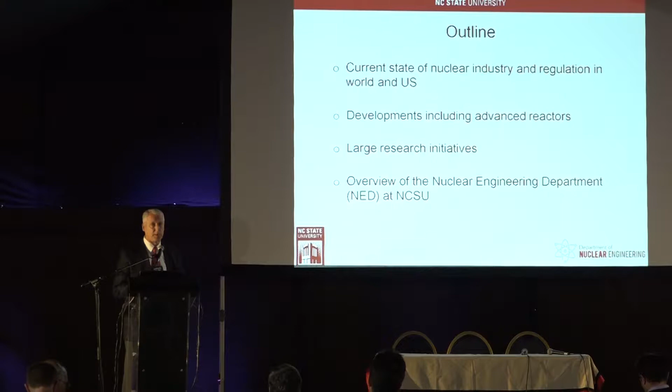So what I'm going to talk about today is the nuclear industry around the world and in the U.S. in particular: advanced reactors that are being developed, large research initiatives including NC State, and the possible collaborations there that we could talk about in the nuclear energy area.

As I mentioned, nuclear energy has been around for quite a while. First generation nuclear reactors were in the 1950s, before many of you were born—before all of you were born, obviously. Well, some of you may have been alive, but quite a while ago. Those plants are retired. We went on to the second generation; some of those plants built in the 1970s are still operating in the United States. Then on to the third generation, certainly in the world, and then the third-plus generation, plants being built now, much safer, much more thermally efficient, with lots of advantages over previous generations.

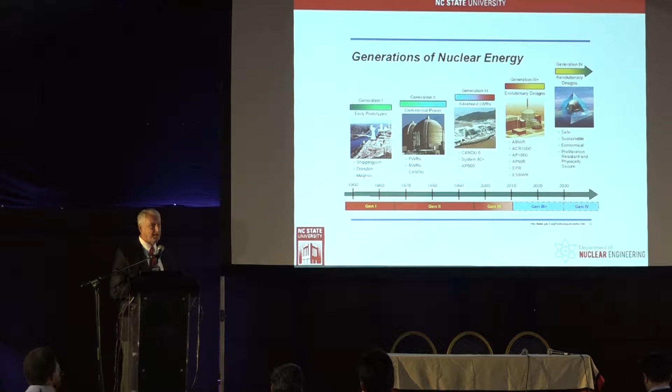So that's really where the action is, and in the future, advanced reactors are being developed in the United States as well as other countries in the world.

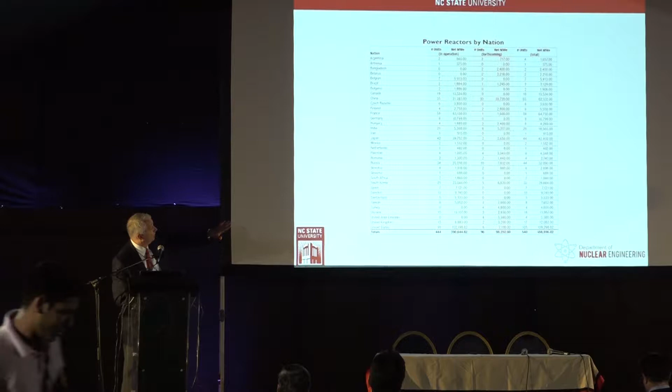Just to give you an idea—I know this is hard to read—it shows where nuclear generation is around the world in various countries, but the second column really shows where new nuclear plants are being built presently around the world. The United States, just a few plants: one was completed, another two to four are being built right now, light water reactor kind of plants. But as you can see, places like Turkey, UAE in the Middle East are building nuclear power plants, and Japan is bringing back online some of its nuclear power. Russia, of course, United Kingdom—the British are building nuclear again because they don't have natural gas, they don't have oil, they don't even have clean coal, so they don't have any other alternatives.

So the reason you see nuclear power being developed in many countries is because they don't have alternatives that would be viable. For instance, China has 30 nuclear power plants being built right now. It's a big worldwide development project. They're using US technology as well as technologies from other countries, and so the United States and other countries are helping China actually get to that point. It's very polluted in China—they burn a lot of coal. They want to get rid of the coal, and they want to use something clean like nuclear energy.

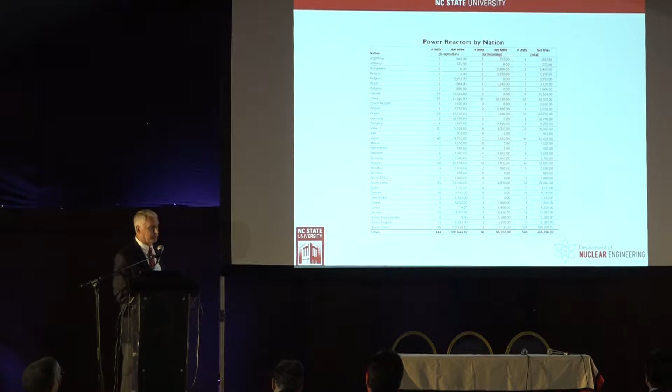But at the same time, you've seen a reduction in use of coal for electricity production, and an increase in natural gas in the United States for production of electricity because of the large new discoveries based on fracking and others, in areas where gas turbines are very useful in terms of handling peaking, and other combinations of gas turbines with renewable energy, very useful. So that's on the increase.

Nuclear is about steady. It's about 20% of the total electricity generation in the US, and that's continuing. There are a few plants shutting down for economic reasons only, so we'll have to see how that plays out in the future. A few plants are also coming online.

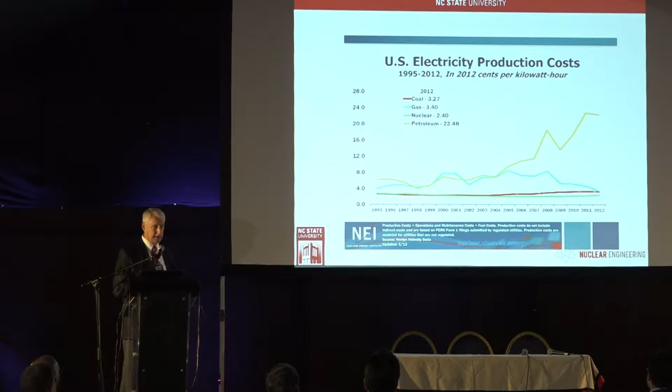Production costs in the US, of course, have changed. Petroleum has gone way up. Nuclear has gone up a little. Natural gas has gone way down because of the new discoveries, and that's why so much natural gas is being used in gas turbines in the US right now. That's really setting the tone for what the cost of electricity is going to be in the US.

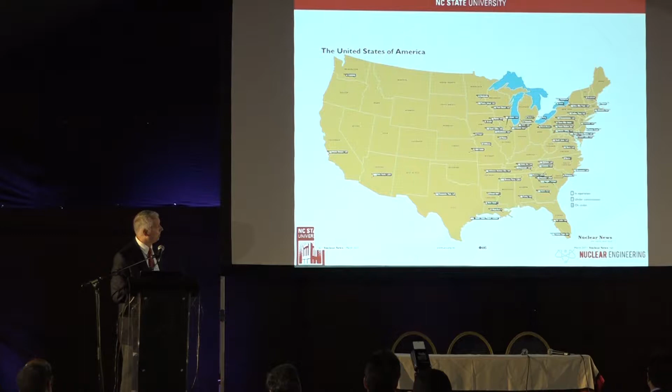These are where the nuclear power plants are distributed in the United States, mostly in the eastern half of the country. Diablo Canyon in California is going to be shut down eventually. So most everything is in the eastern part of the United States, and any of the new plants being developed and constructed in the US are mostly in the southeastern part of the United States, including North Carolina, of course, on the East Coast. So we're in an area where new generation is needed because it's a growing economy, a growing population, and that's where you see the development of nuclear power and renewables in the United States.

So I'm going to talk about some of the new developments in nuclear energy and what some of the universities are doing to help participate in this redevelopment of nuclear energy in the future.

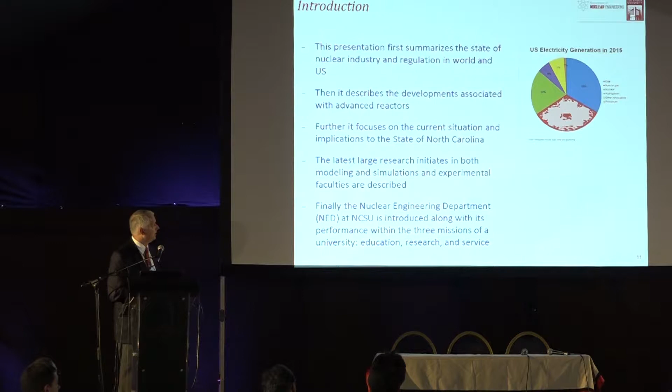Nuclear energy projects are large projects, lots of concrete, lots of steel, lots of construction workers, lots of jobs. So it's a very intensive kind of energy source. From that point of view, it takes a whole commitment of a country, commitment of a government, commitment of economic resources to accomplish this, and that's why everyone is not doing it.

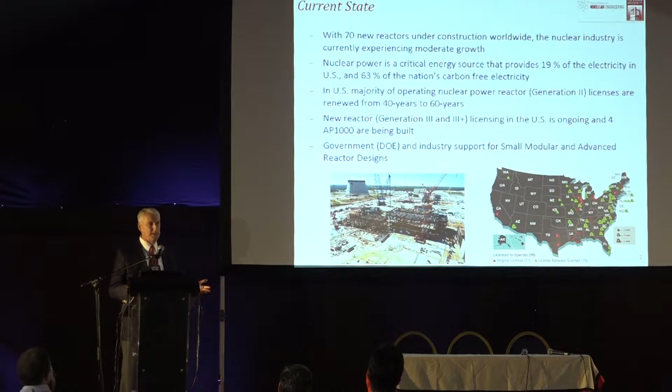At the same time, though, it provides stability. Price of uranium is very low. There's no CO2 emitted in the process of nuclear energy. The waste problems are very minimal and can be handled, and so in that sense it's actually very safe. At least in the United States, there have been no accidents in many, many, many decades, and no deaths at all in that technology. I would challenge any technology of any size to make that claim.

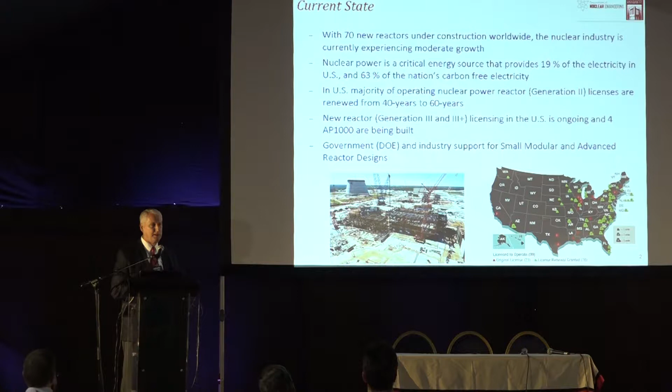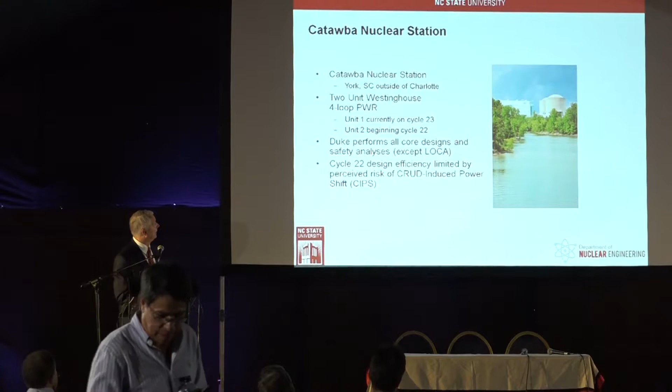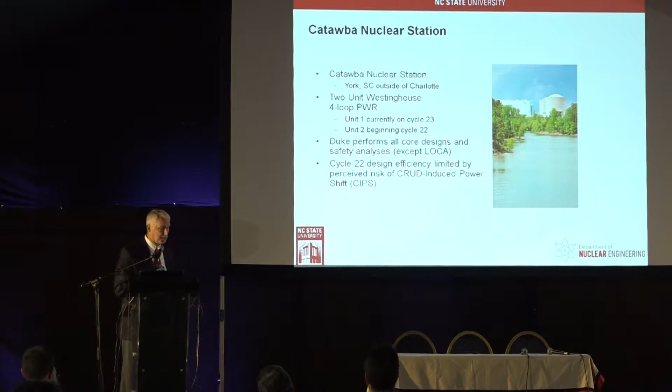So you can see, as a carbon-free source of electricity, this is very important for the United States and for the world. As an example, in our backyard in North Carolina, the Catawba station outside of Charlotte has been operating for many, many years. The kind of problems that our university, NC State, is working on through one of our consortia is eliminating one of the sources of downtime operation in that facility, called crud, which is part of the chemistry problem associated with water flowing through the reactor.

Watts Bar is another nuclear power plant that our faculty and students have worked on. Watts Bar is in Tennessee, not too far from us, and this is a very important source of power for that region of the country.

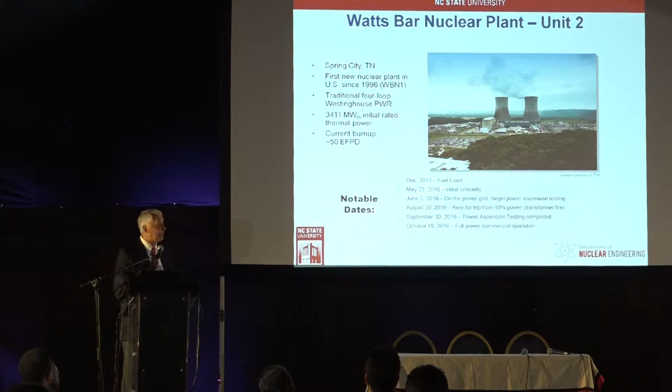In the near future, it looks like the market for nuclear energy around the world will be involved with smaller plants rather than larger plants. Smaller plants have the advantage that you can build them perhaps quicker, put them in place in modules, in smaller bytes or bits, but they're still pretty big. They're still 50 megawatt or 100 megawatt electric devices. But you could put a couple in this tent.

It's not too big. On the right, you would see what one of these small modular reactors would look like. There are companies in the United States building these now. NuScale company is building a modular reactor of this type. It will be safer, it's more efficient, requires less water, has the advantage that if there is some kind of disturbance, it can sit there and percolate on its own. It doesn't need off-site power. So a very safe kind of reactor concept.

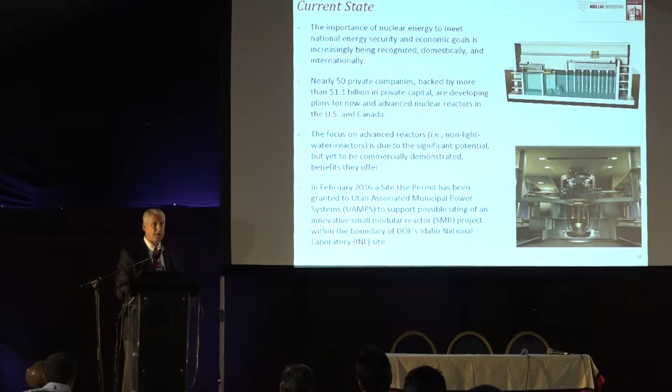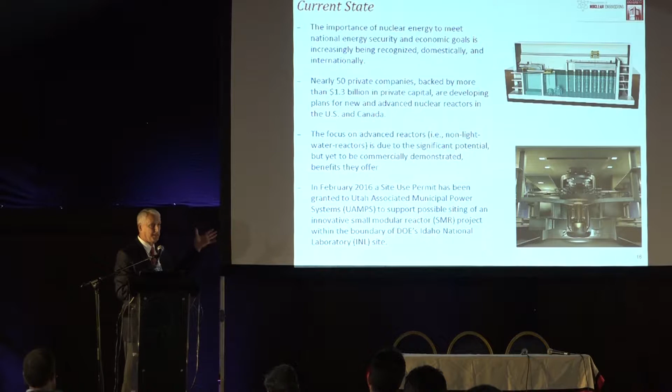NuScale building this kind of device is actually going to be sited perhaps at the Department of Energy Idaho National Laboratory site out in Idaho, where many of our faculty and students work alongside the Idaho National Lab staff. So this is very exciting for the United States to see NuScale produce a new modular kind of reactor with many advantages. So in the future, you may be seeing more of these, not only in the United States, but around the world. Other countries are developing modular reactors.

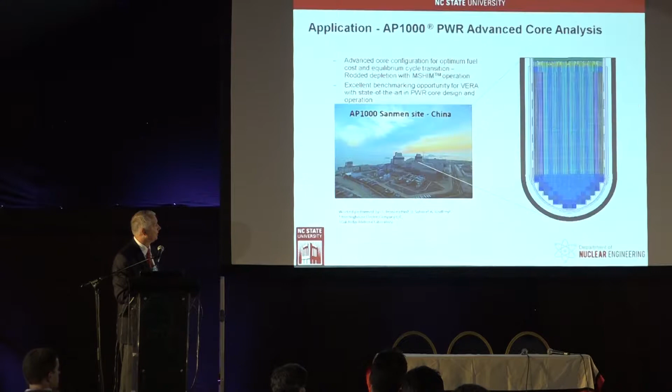Again, no, going the wrong way.

License renewals in the U.S. through the Nuclear Regulatory Commission, very important topic. There are various scenarios in the future depending upon how the license renewal process goes as to what fraction of the total amount of energy will be delivered by nuclear. Remember, nuclear is a baseload kind of electricity. Dr. Iqbal mentioned the load following problems associated with renewables, and so how do you integrate that into the grid? Nuclear is one of those sources that's pretty steady. It can go up a little bit and can go down a little bit with time, but it's a baseload capability, which has strong advantages for stability in the grid.

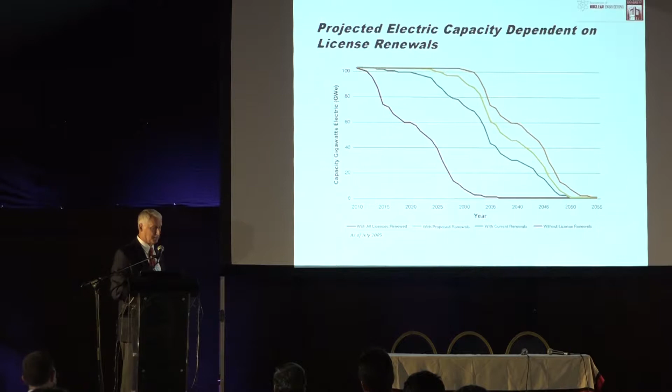These are some of the types of reactors in the U.S. fleet right now from various vendors. AP1000 from the Westinghouse organization, advanced boiling water reactor from General Electric, and new designs coming online all the time.

These are some of where new licenses are being developed, possibilities in the U.S., and again, many of them in the Southeast, including Florida, Texas, North Carolina. Whether or not these will be built, we don't know for sure. They're just going through the process of starting the licensing because it's a 10-year process to get through the licensing. We want to make sure we build these things safely. So the Nuclear Regulatory Commission watches over these very strongly.

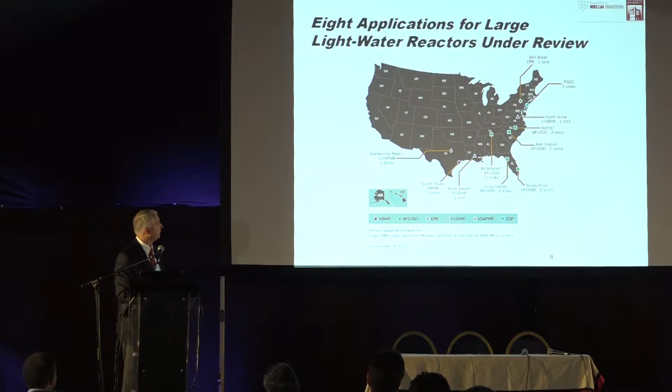Some of the advanced reactor concepts that people are talking about are not only being invested in by the Department of Energy, which is, I guess you could say, where we do the basic research, but also many companies, as you can see here, are coming up with new designs for new, advanced, safer, more efficient reactors based on non-light water reactor technology and different designs that have many advantages.

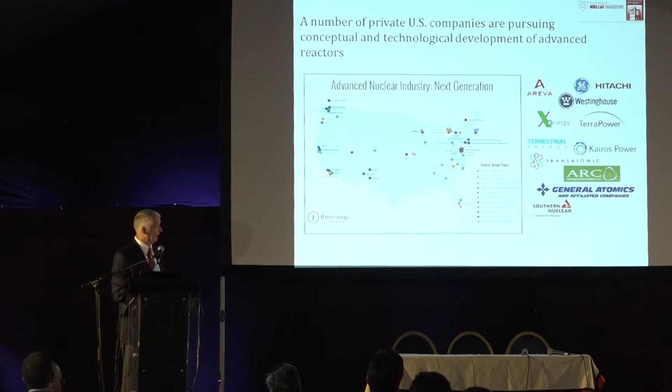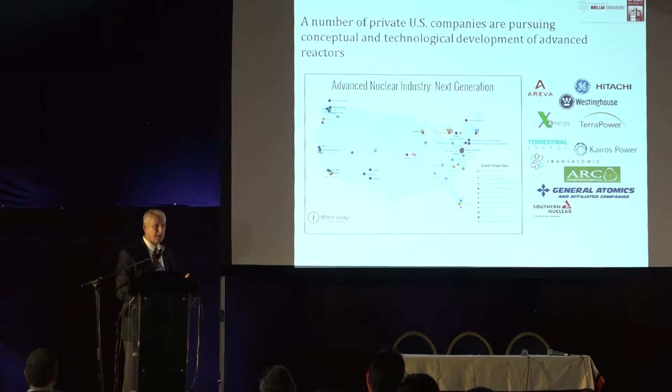For instance, I'd point out TerraPower. TerraPower is owned by Bill Gates, who owns, of course, Microsoft. He's investing in nuclear power because he sees the advantage of providing baseload power for lots of different reasons, for various countries around the world, as well as for electricity for many of his computers, I suppose, and data centers as the future evolves. So many companies are involved with these new generation designs.

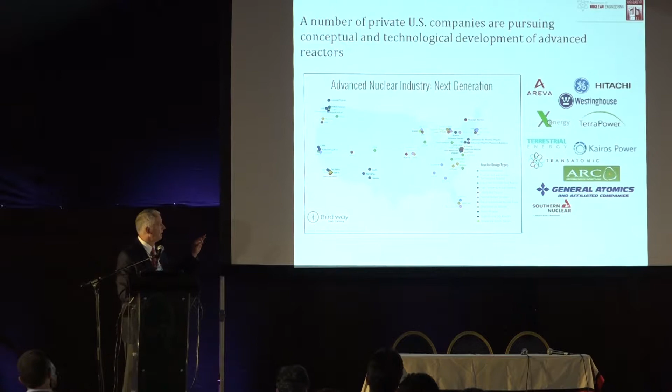Some are very small companies, like Transatomic, which is a spin out of MIT. NuScale was a spin out of Oregon State University, and so forth.

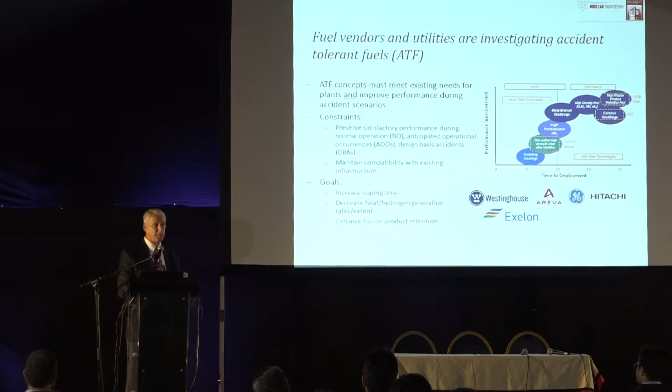So another initiative by many of those companies and the Department of Energy, and also that our faculty and students are working on, is something called accident-tolerant fuels. If you remember in Fukushima, one of the reasons that the plant there had instabilities was because of hydrogen released from the zircaloy fuel cladding. Accident-tolerant fuels means that new fuels are being developed that don't develop that capability, so they don't produce hydrogen under high temperature conditions.

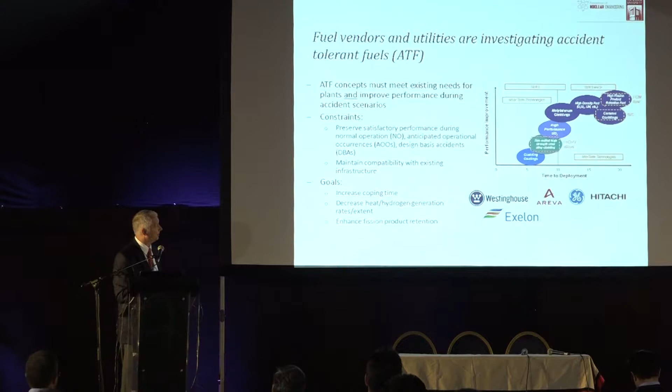So a number of our faculty are working on different kinds of cladding and or fuel structures that will avoid that problem. Much of our money from the Department of Energy is going in, as well as from companies, to develop these kinds of new fuels. And of course, it takes 10 to 15 to 20 years to develop these kinds of new structures. That's why universities are involved at the present time in making sure that we can come up with new forms of, for instance, stainless steel or other alloys that don't have the same problems as zircaloy.

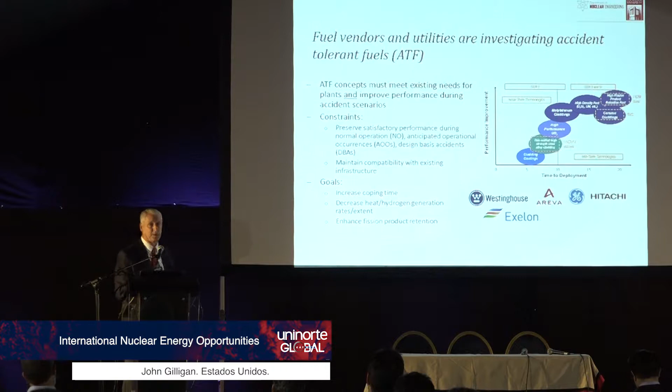There's legislation occurring in the U.S. Congress to help nuclear develop, as well as in the current administration, not only on the nuclear energy side, but on the nuclear security side. Because whatever we do, we want to make sure that nuclear material does not get into the wrong hands. So nuclear security, along with nuclear defense, as well as the nuclear non-proliferation problem we're talking about here, are all very important to the United States and to our allies.

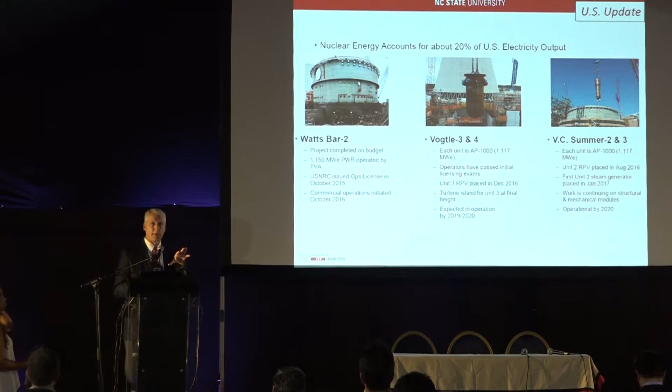These are the plants that have either been finished, are being finished, or eventually will be finished in the U.S. Watts Bar was just completed. Vogtle 3 and 4, on the Georgia-South Carolina border, hopefully in the next year or two, are very large plants. The Summer plants are currently on hold and will probably not be finished on time until a new owner is found, so that's a big uncertainty right now in the U.S. But our graduates from NC State University are involved with construction of all of these plants. In fact, the construction energy business in the U.S. for nuclear is based in Charlotte, North Carolina, which is about 3 hours from NC State.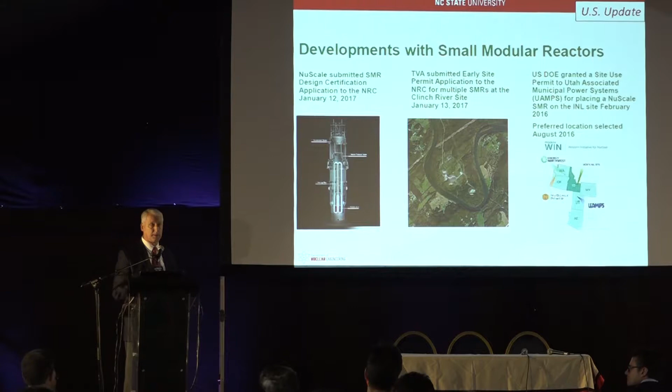So I mentioned the small modular reactors. This is another slide showing the size and scope of the SMRs on the left. A possible site either at Clinch River or in Idaho will more than likely occur. They've submitted their licensing documents to the Nuclear Regulatory Commission, so these are moving right along. They have funding, and they're looking for that development site to show what they can do and how quickly they can come up to speed.

Many private organizations are supporting the development of nuclear energy in the U.S., as I mentioned, including private institutions, Electric Power Research Institute, Third Way, which is a national think tank that looks at nuclear energy policy as well as energy policy in general, and organizations organizing the advanced reactor community. So there's still a strong interest in nuclear in the U.S.

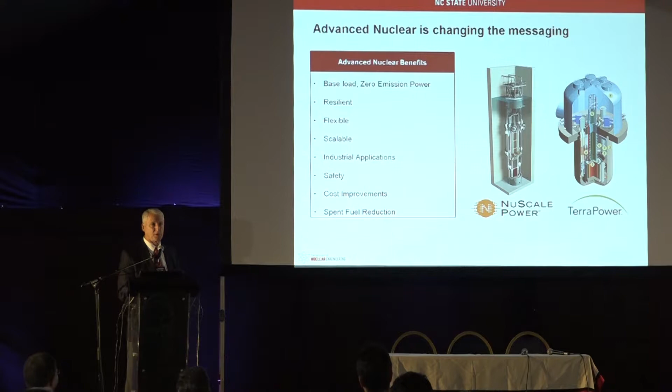Again, another picture of the NuScale power plant as it would be built. The advantage of the NuScale plant is that it's built in a manufactured environment, in a separate plant, and then carried by truck or train to the site where it's going to be located, dropped in the ground, or in a concrete vault, and hooked up to the water supplies, et cetera. So all the manufacturing is done prior to arrival on site. It should be much cheaper, much more straightforward, much more reliable than trying to build on site.

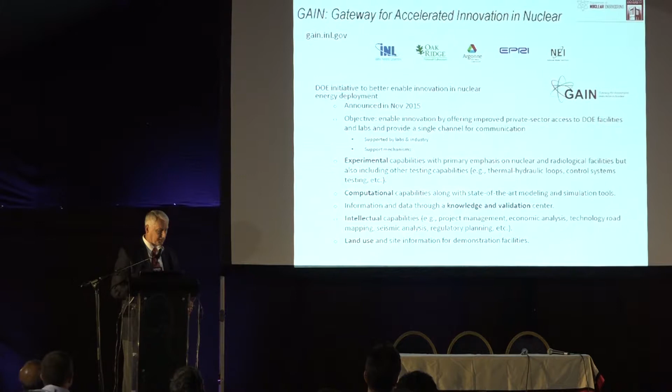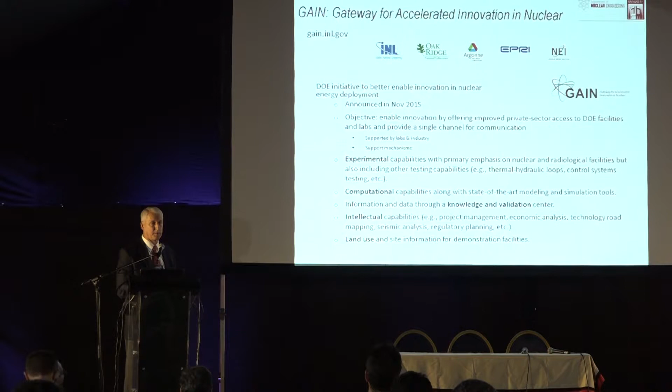One initiative that the Department of Energy has right now, as well as supporting the universities, is something we call GAIN, the Gateway for Accelerated Innovation in Nuclear. GAIN is an attempt by the Department of Energy to integrate and get more support to industry in the U.S. This is just one way we're going to do it. It opens up all the national laboratories to accessibility by private industry in the U.S. This is very important so they can do testing, radiation hardening experiments, et cetera. The idea is to support industry from the government in a more meaningful way and hopefully stimulate more interest and development in the nuclear area. This is the second year the GAIN program has occurred. There's a voucher program where small amounts of money are available to support this, and it's moving along very nicely.

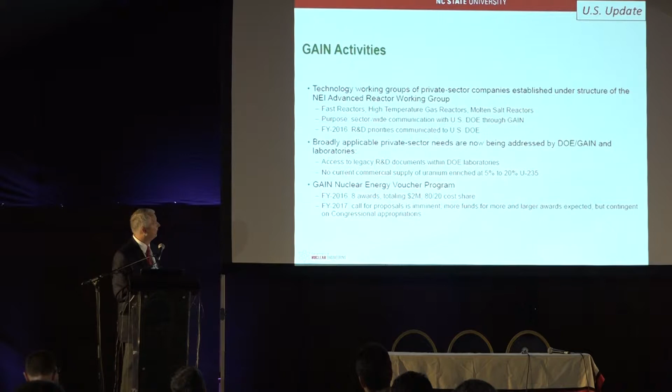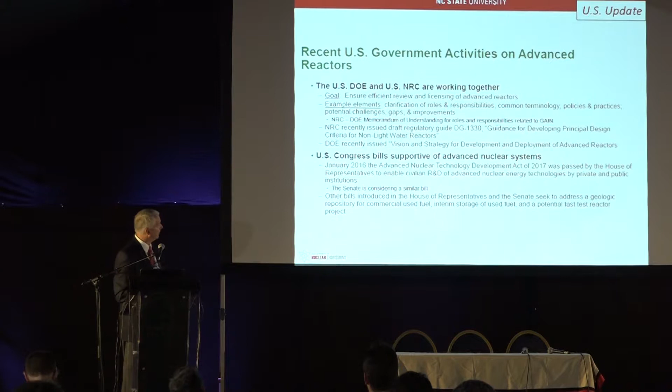This is also a word slide that shows some of the support from Congress and others in terms of working together along with industry to support nuclear.

There are a number of different reactor concepts out there. One of the new ones being revived, I guess you could say, is the fast breeder or fast reactor as a testing facility. This is a facility that would probably cost on the order of $3 to $4 billion and would likely be built at the Idaho National Laboratory. Some of our faculty at NC State are now working on this design to help the Department of Energy. Our students and faculty are actively getting involved in this process right now through projects and joint faculty positions with the Idaho National Laboratory. So it truly is a joint university, national lab, and industry effort.

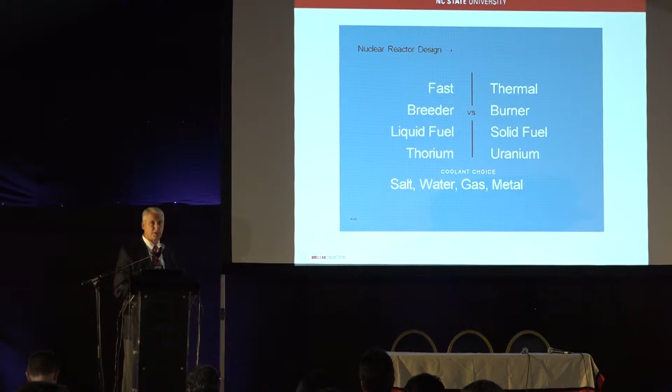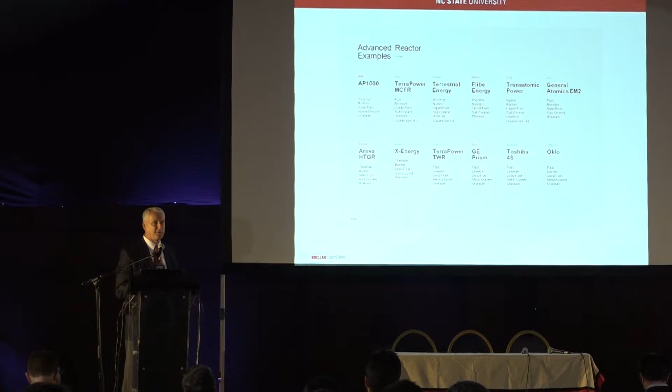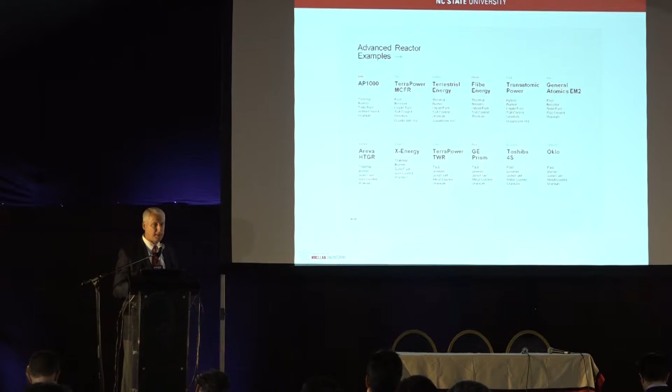Again, this is a list of the number of companies involved with the advanced reactor community out there in the U.S., TerraPower, Terrestrial Energy, et cetera. It's very exciting to see all of this private venture money coming in now. It's not the same old people designing the same old reactors. These are new venture businesses putting real private money into development of new, safer, advanced nuclear designs, and that's very exciting. I've never seen anything like this in 30 years. It's really an exciting time to be a nuclear engineer, working in the nuclear power area, for both students and faculty, because of the many opportunities that have come about recently.

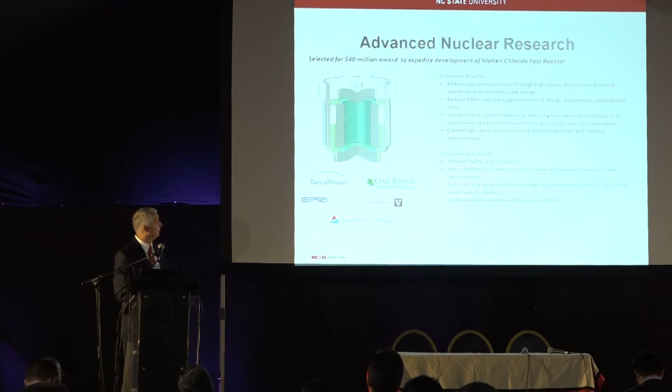There are plants being shut down in the U.S. right now. I did want to mention that. It's not because they don't work or because they've had an accident or anything like that. It's because the price of natural gas is so low, they can't compete economically to produce electricity. So if you can put in a natural gas peaking unit, or even a base load unit with gas turbines, with very low cost natural gas, even existing nuclear power plants can't compete with that.

Neither can renewables, for that matter, or many other sources of energy. So it's a concern in the U.S. that some of these good plants are being shut down because you lose stability. The price of natural gas tends to go up and down over long periods of time. It may have environmental impacts. And as we sell more liquefied natural gas to other countries, the price of natural gas may go up because there is a world market for that product.

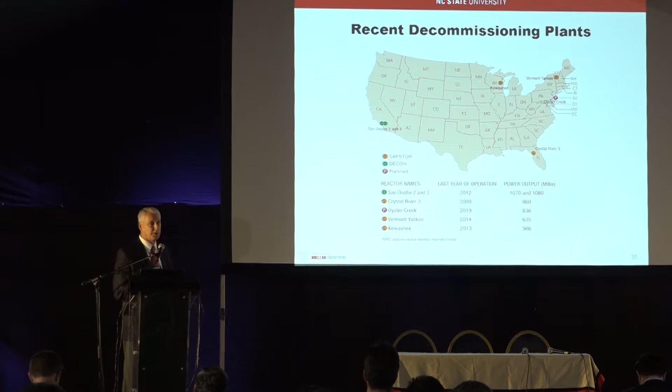So we're watching this very carefully in the U.S. It does mean that as some new plants come online, some of the older ones will be shut down in certain markets.

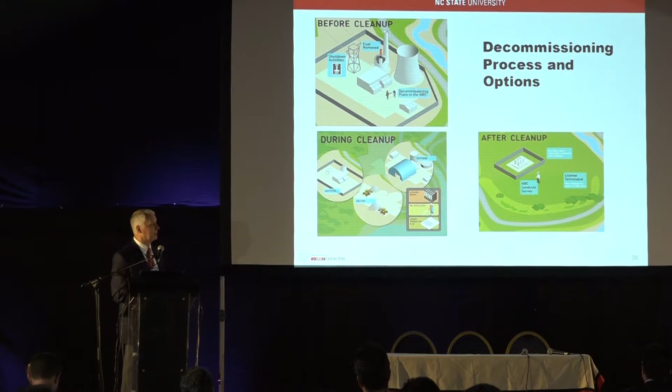So in the decommissioning process, you're talking about, of course, taking the old fuel out, eventually taking each of the components out, disposing of those in a safe way, and then after cleanup, making that site perfectly clean again, confining anything that might need to be confined. Of course, many plants have already been shut down in the U.S. over the years—probably 25 plants. So it's nothing new, it's just an ongoing process.

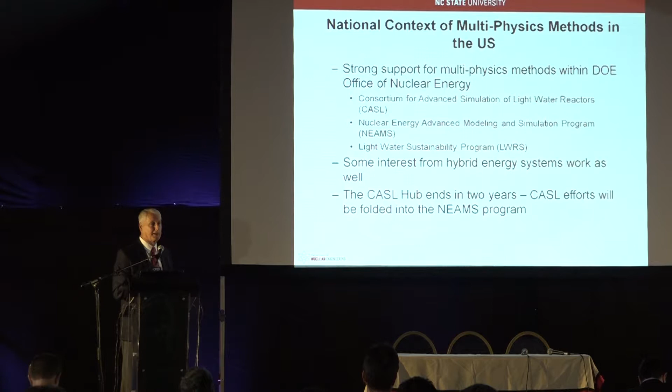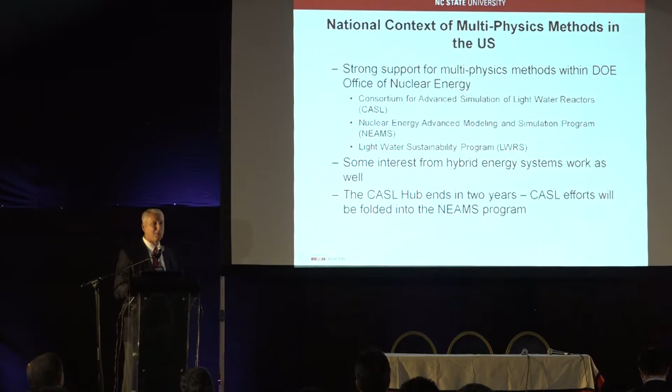Some of the projects our faculty and students are working on are design efforts. We have a very large innovation hub sponsored by the Department of Energy called CASL. CASL stands for Consortium for Advanced Simulation of Light Water Reactors. NC State is the main university, with partners MIT and University of Michigan. As part of this group, we're designing new computational tools for this next generation of nuclear reactors to make them more safe and less costly, but more efficient. So it's a big effort along those lines.

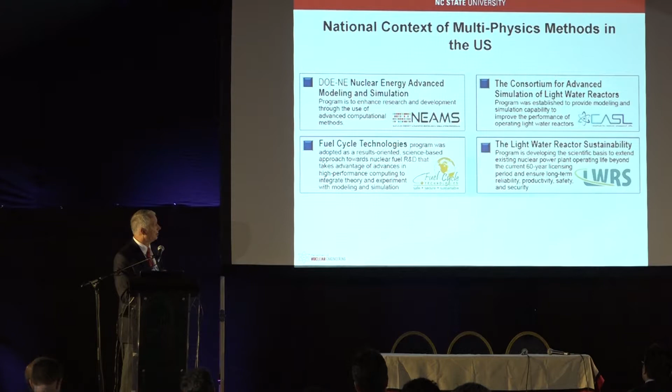CASL, up on the right, is one of our efforts in nuclear engineering at NC State, sponsored by the Department of Energy. Of course, there's also the light water reactor program out of DOE, fuel cycle technologies, and NEAMS, which is the computational group out of DOE—a multi-kind of approach to designing new reactors using computational tools that weren't available 20 or 30 years ago.

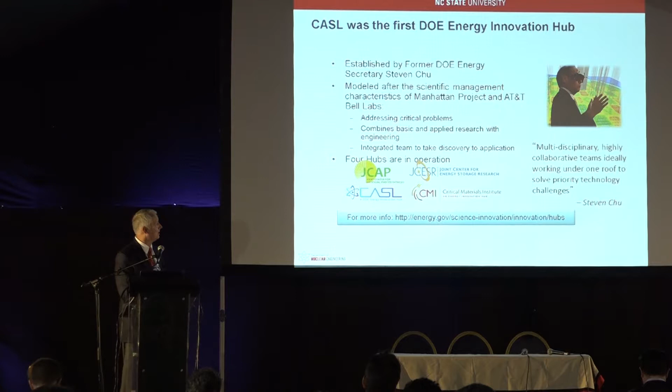This is CASL. That's the previous Secretary of Energy, Steven Chu, who helped get this going. A very exciting project, it's been ongoing now for 8 years, about $27 million per year over that period of time, involving multiple universities, national labs, and industry. I'll show a picture here—skip over that.

This is an example of the kind of large, meaningful work we can accomplish at a university like NC State. So I hope some of you are interested in studying these kinds of subjects in the future, in graduate school or even as an undergraduate. We have undergraduate students working on these projects alongside our faculty or any of our partners as well. So I think it's a great opportunity, and we hope you can be involved with these kinds of things.

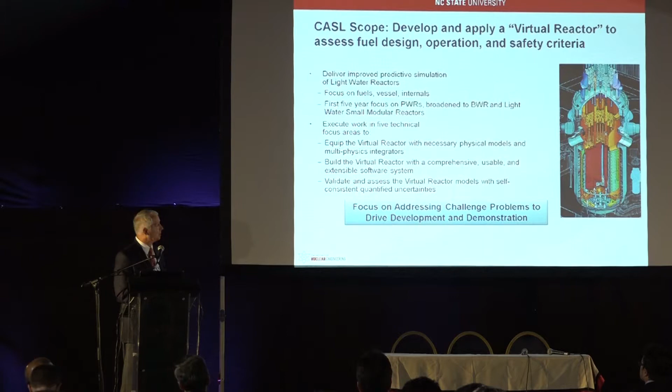It's multi-scale, multi-dimensional modeling, including multi-physics, which includes the chemistry, the materials, the two-phase water, heat transfer issues, as well as the nuclear processes, radiation transport, et cetera. Very exciting field. We're competing with the French and others to develop the best tools in the world to design these kinds of reactors.

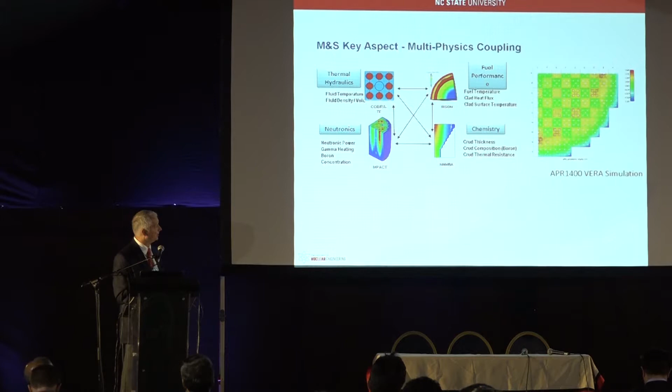I'll skip over some of the modeling details, but you can see it's three-dimensional, multi-physics modeling. That's what the core of a reactor looks like in real time when they're shuffling the fuel around. It aids the designers of nuclear reactors very much in seeing how things are going over a period of a cycle of the core itself.

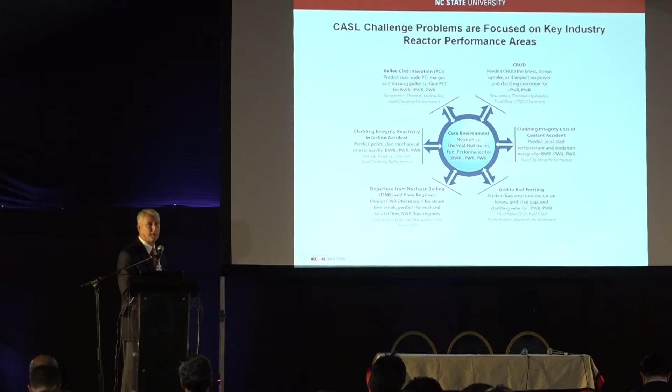This is the kind of work our students are involved with, a variety of problems involving a lot of multidisciplinary work, which is essential to solve these massive problems associated with new technologies.

This is a general slide showing another line of DOE work involving new computational tools outside of CASL. It's called the NEAMS program. This one is a bit smaller, about $20 million a year, and it involves other labs and universities throughout the U.S., as well as some of our faculty at NC State.

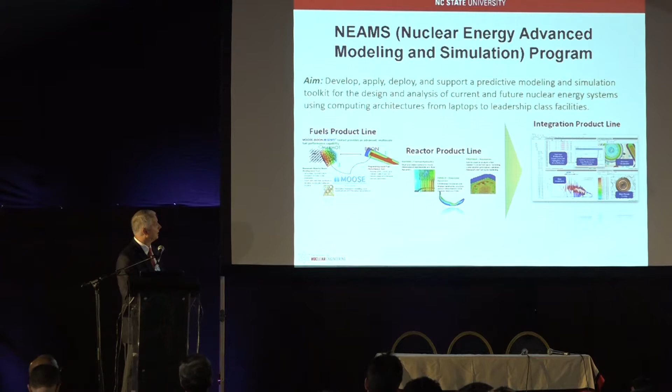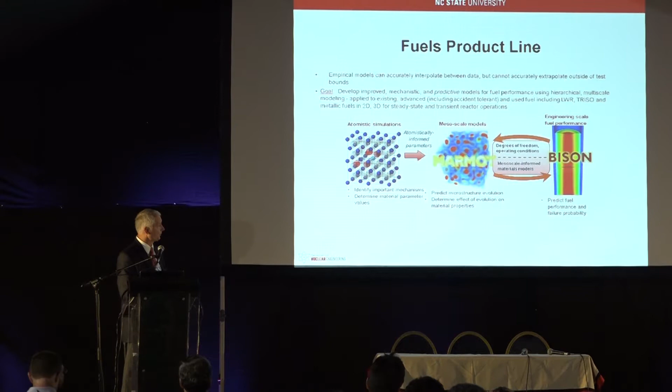This covers the fuels product line, which is the design of new fuels, as I mentioned. New codes are developed between INL, Oak Ridge National Lab, NC State, and other universities, ranging from the very basic atomistic simulation to mesoscale modeling up to engineering scale modeling—all very important.

I'll skip over the details of the fuel design here and the details of the codes that are connected together to do this kind of simulation.

This is also kind of work that the Naval Reactor Program does in the U.S. Of course, the Naval Reactor Program designs the reactors for nuclear submarines and aircraft carriers, et cetera. It involves a similar set of codes for the design of those reactors, but those reactors are classified, so we don't work on them directly, even though our graduates go into those programs in the U.S.

These are the major national laboratories in the U.S. working on nuclear issues. I mentioned Oak Ridge National Lab, which is not too far from us in North Carolina—Oak Ridge is in Tennessee. The other major labs are Idaho National Lab out in the west, which we work with very closely, and Los Alamos and Argonne National Lab in particular. Those are the major partners we work with.

Of course, I think we need to be concerned a little bit about nuclear waste in terms of how those products are stored over a long period of time. So we have students and faculty working on solutions for storage of waste.

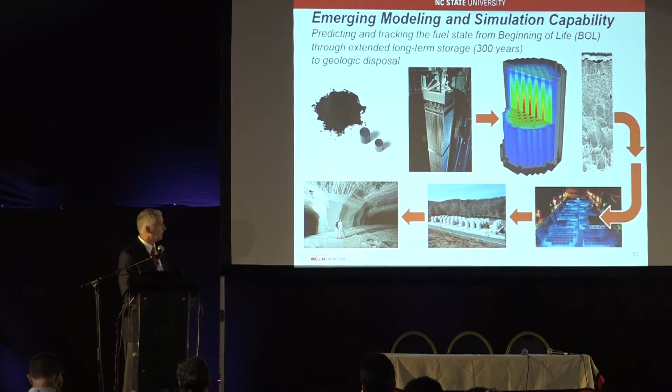Right now, spent nuclear fuel is stored on site at most locations in the U.S. There are plans to put that spent fuel into longer-term repositories and store it safely in caverns like Yucca Mountain, which is being revived at present, or to recycle that fuel and use it over again—that's another possibility.

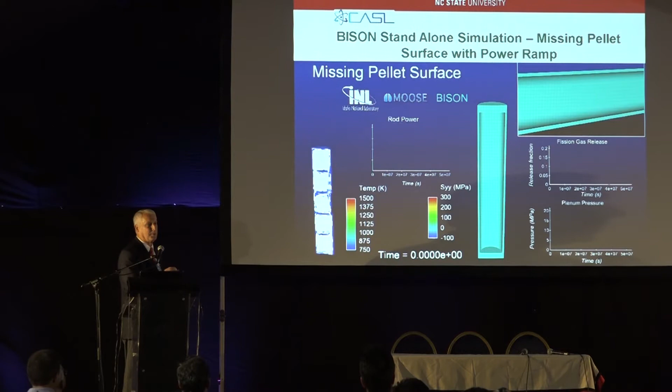These were actually very important codes for analysis of temperature, chemistry, heat transfer—all very real engineering problems—plus radiation transport and heat development within the nuclear structure. Mammoth is another one, along with Rattlesnake and Bison. Very exciting place to work.

In terms of NC State's nuclear engineering program, NC State had the first degrees in nuclear engineering in the United States. Think about that—when were the first degrees in nuclear engineering awarded in the U.S.? It turns out the first master's degrees were in 1953. The first PhDs in the United States were in 1955, at NC State University. The first nuclear reactor in the U.S. in a non-classified university environment was also at NC State, in 1953.

In fact, the first student to receive a PhD in nuclear engineering in the United States was from South America. Does anyone know what country? It's not Colombia, unfortunately, but it's another country in South America.

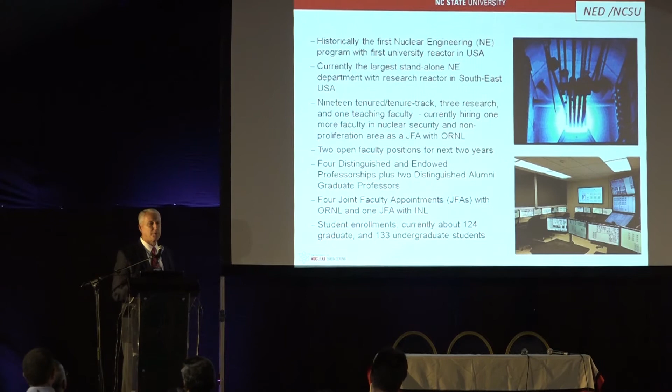Argentina, close, no it was from Brazil. One of the students in 1955. So we're very proud of that. We also had the first woman PhD in the United States in nuclear engineering in 1970. She was from Egypt, but she was the first woman PhD in nuclear engineering in the United States, 1970. So we're very proud of the heritage that nuclear engineering has in the world, and in particular, the United States.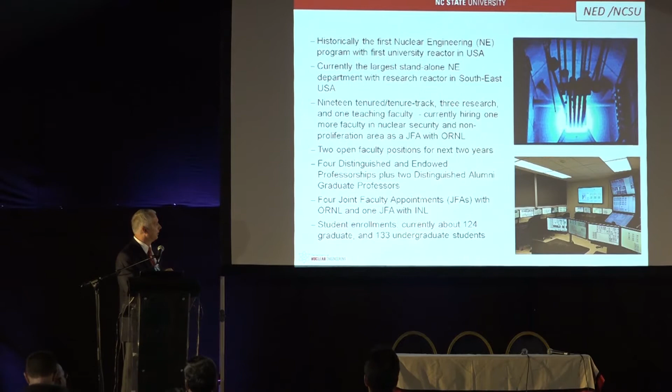Currently we have 124 graduate students, 133 undergraduate students, and I'll show you the faculty here. There's faculty involved in a variety of areas. We've hired a number of new faculty from around the world: China, Germany, the Middle East, and others. These are world-class faculty that if you come to NC State as a visitor, as a student doing research or something else, these are the kind of people that you would be working with.

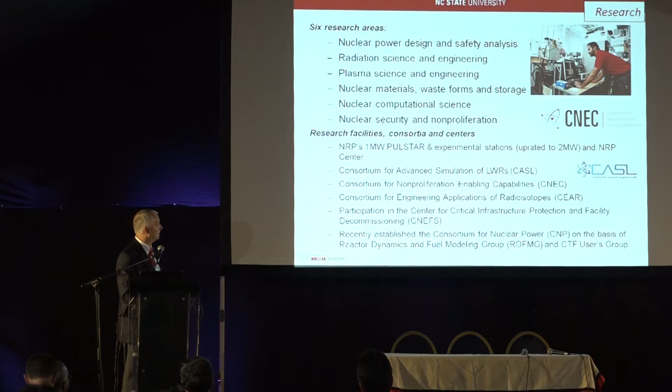So we're very proud of that fact. We do have an existing 2-megawatt nuclear reactor. It's our 4th reactor, and it's the only sizable reactor in the southeast of the United States at a university right now. We're very proud of that. And a number of nuclear centers, as I mentioned, including CASL, but also other centers working on nuclear power internationally with the South Africans, with many countries in Europe, the Japanese and others. It's just a wide-ranging, expanding kind of work environment.

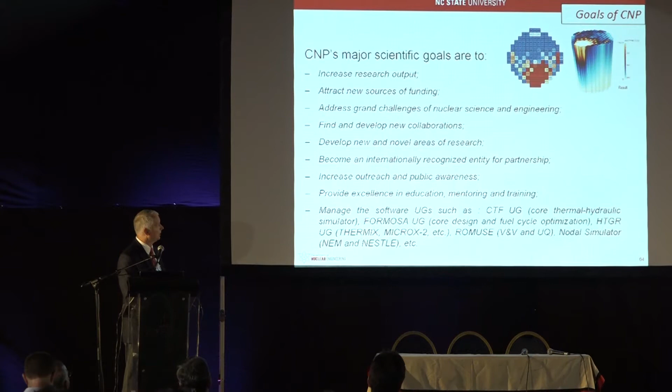So these are the kind of codes that students work on. We also have education programs for K through 12, et cetera. And this is a particular center that's working on novel designs of new core designs for existing power plants that make them more efficient. Kostadin Ivanov and Maria Avramova are working on that.

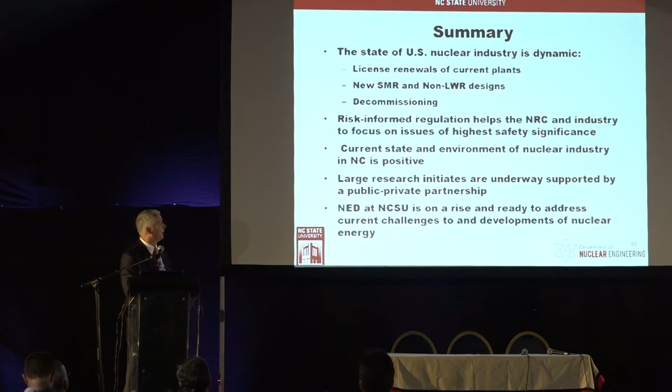So I'm very proud to present the kind of activities our department, but also where the state of nuclear energy is in the world, and in particular the United States. I still think there's many opportunities. There's lots of jobs available at every level, bachelor's, master's, and PhD, in the U.S. as well as other countries in the world, as nuclear expands. So I would invite those students that are interested in this new and expanding field to consider NC State.

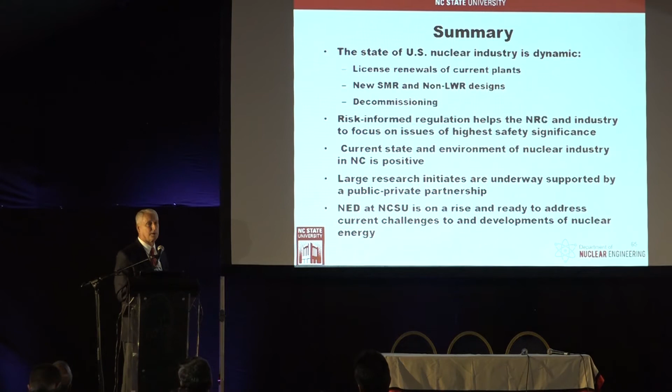The other things I didn't even mention were things like medical uses of radiation, which has expanded considerably, and our faculty are involved with medical physics and those kinds of applications, also use of radiation in many other different kinds of applications, industrial and others. So a variety of possibilities there. So I very much thank you for your attention, and if you have any questions, I hope to answer them. Thank you very much.

Good day, Mr. Gilligan, thank you for your presentation. You're very welcome. I would like to make a two-part question, maybe.

Throughout the whole presentation, you were talking mostly about fission, nuclear fission, because it is actually the only effective process we have worldwide. I would like to know if the NC State research team has approached the possibility of fusion, or the generation of electricity through the burning of radioisotopes. I believe it's another form of generation.

Yeah, those are two good questions. Yes, we do. In fact, my field of research is in plasma physics. So when I still have students, they work in plasma applications, which of course is the fundamental building block of nuclear fusion in the world right now. So we do have programs in nuclear fusion at NC State. We have three faculty working in that area: Mohamed Bourham, Katharina Stapelmann, and Steve Shannon, and including myself.